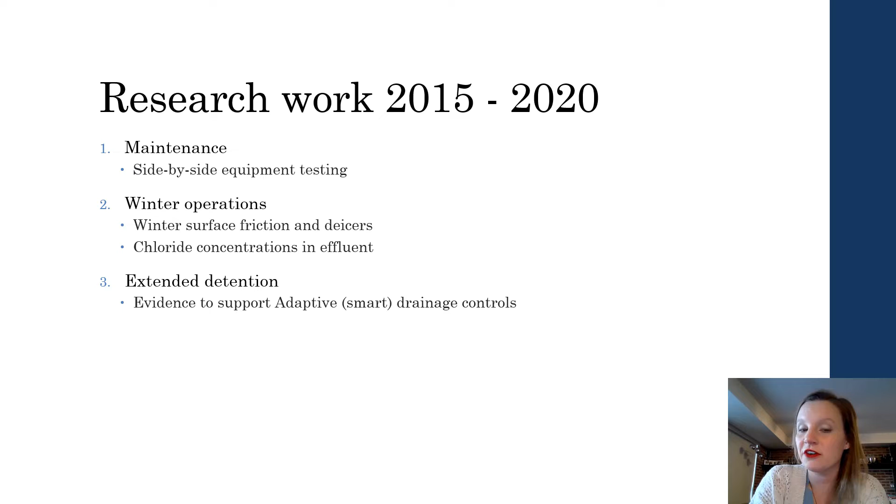Winter operations, looking at winter surface friction and best practices for de-icers, as well as observing chloride concentrations in effluent from operational permeable parking lots. And then lastly, some really new research we're just wrapping up now, looking at the use of extended detention and generating evidence to support adaptive or smart drainage controls for permeable pavements.

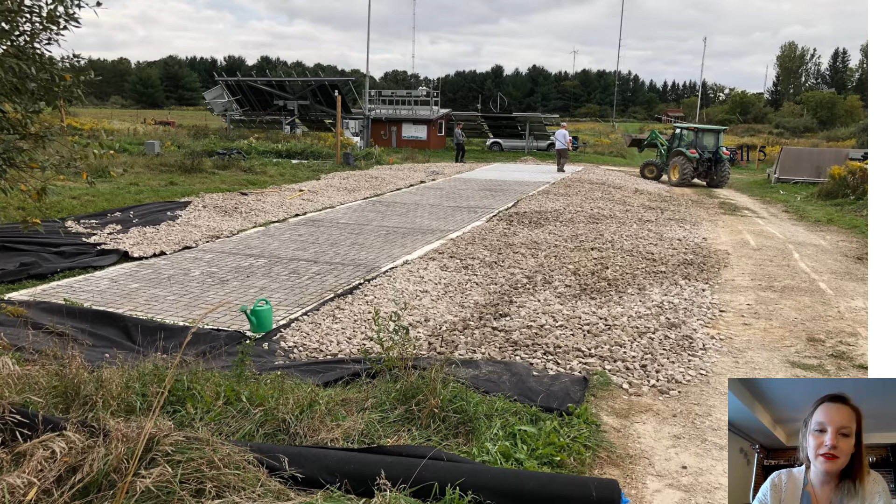So to begin with, let's talk about maintenance. Permeable pavements are passive filters. They're designed to collect all of that sediment and manage it on site instead of moving it along with the stormwater downstream. And so over time, they become clogged. The material will accumulate. That's what we intend it to do. And as that material accumulates in the joints, it leads to a reduction in surface infiltration capacity. And so over several seasons, particularly if there's no attention or no operations, some kind of maintenance or restoration will be required.

So in this research project, what we did is we constructed with ICPI a test pad of permeable interlocking concrete pavers and artificially clogged them. And then under this scenario, we were able to test in a side-by-side, reproducible manner several different maintenance technologies that may be available to property owners or municipalities. So you can see here in the picture, this is just a picture of our experimental site, and you can actually see the pavement as it's been clogged.

So to clog this pavement, we built our own sediment from waste from local yards, municipal yards, and we graded these materials so that they matched the same size distribution that you find when you go to an operational parking lot. So we applied then this in an accelerated form directly to the joints, measuring the exact amount of mass that we wanted to apply and applying it directly onto the joints. This is kind of new because with permeable pavement, water most of the time is rained directly, so you're not actually getting run-on of stormwater.

So once we clogged the surface, then we used ASTM C1781 to assess or quantify the surface infiltration. So it's a single-ring infiltration test. We pour a known quantity of water into a ring and measure how long it takes to drain. Guidelines generally recommend that a PICP requires maintenance when the results from this test fall below 250 millimeters per hour.

And what we can see in the graph in the bottom corner here is that, following this clogging process, infiltration rates on each individual pavement cell were comparable. So it was reproducible, and we knew with confidence that we had clogged the pavement uniformly. So they were all starting with the same baseline clogged condition, so that it would be a fair comparison when we evaluated the different maintenance technologies.

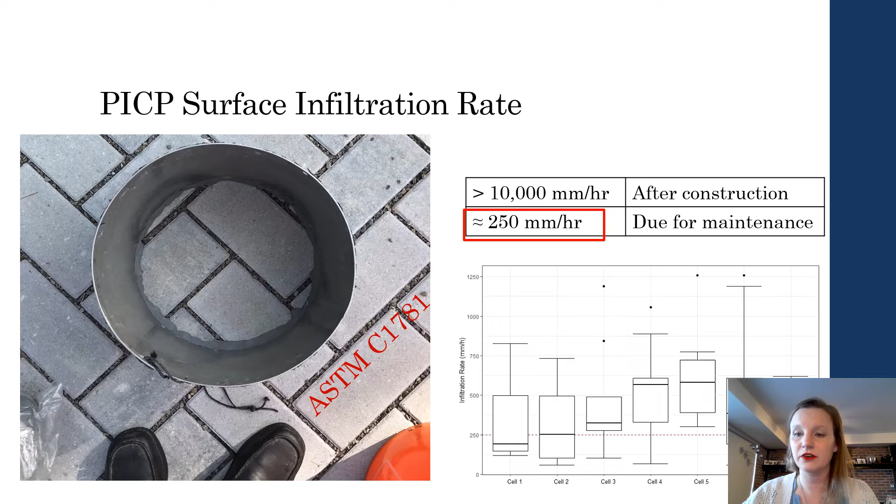So we tested 5 maintenance technologies, and these were selected consulting with industry to pick technologies that not only were likely to be effective, but also technologies that are generally available to property owners. So the first technology that we tested was supplied by the City of Toronto, and it was a regenerative air sweeper. For the City of Toronto and many municipalities, this is their common fleet now. Cities have switched to regen air sweepers because they produce less dust, which is important for urban air quality downtown.

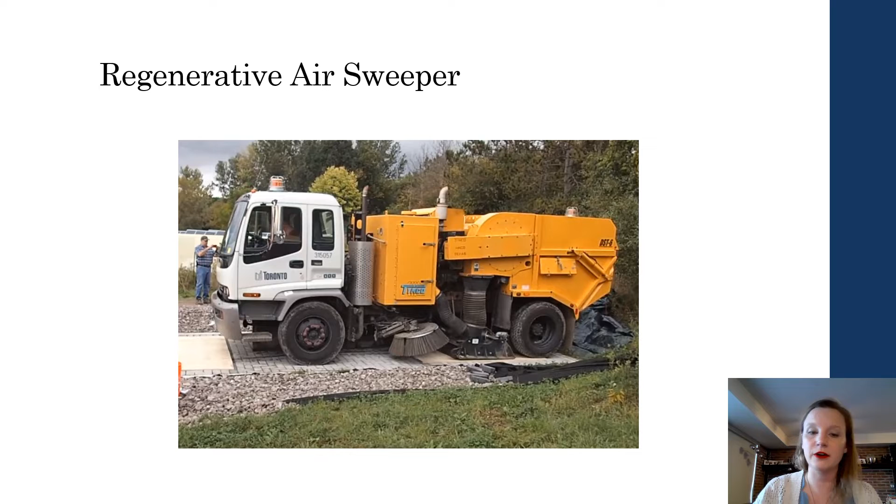Then we also tested a specialized equipment called the PaveVac, and this is a two-phased system where first the pavement surface is treated with pressurized air. That's the circular head that you can see in the one photo, and then following, the disjointed or dislodged material is then vacuumed with a high-strength vacuum.

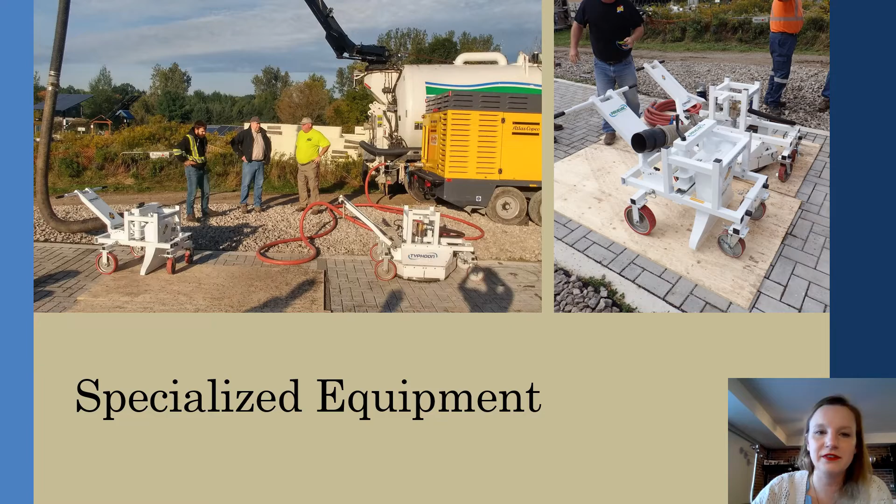So this is a product that is currently available in the US. I know that they have intentions for coming up here as well, and this was their first Canadian demonstration of this technology. Potentially fit into some of these smaller locations or odd corners that you might have on a pavement surface.

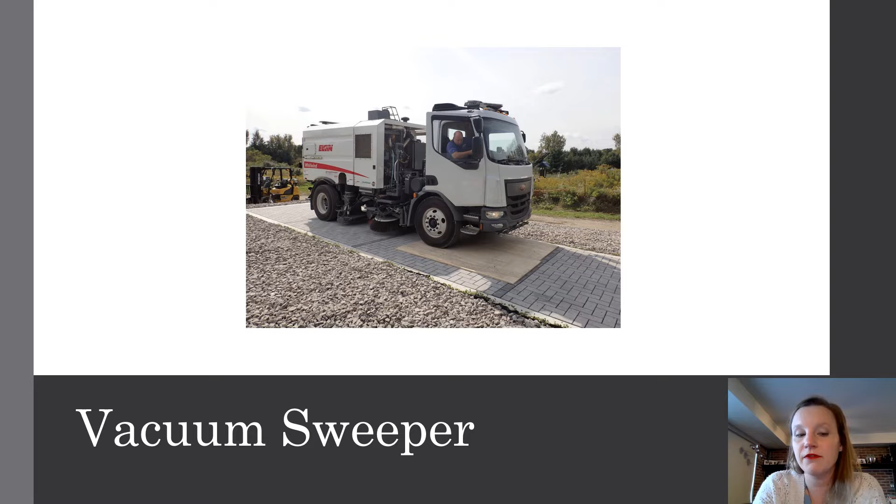Another common maintenance approach, particularly for small installations, say like an individual residential driveway or a walkway, is pressure washing followed by manual vacuuming with a shop vac. So that was, again, a third treatment or technology that we tested. And then we tested a true vacuum. This is an Elgin Whirlwind, so this is a vacuum street sweeper.

The last street sweeper that we evaluated was a waterless mechanical sweeper. This is the Elgin Eagle. So this is fully mechanical, doesn't involve water whatsoever, and was a newer street sweeping technology that was available. So here we have a little video again.

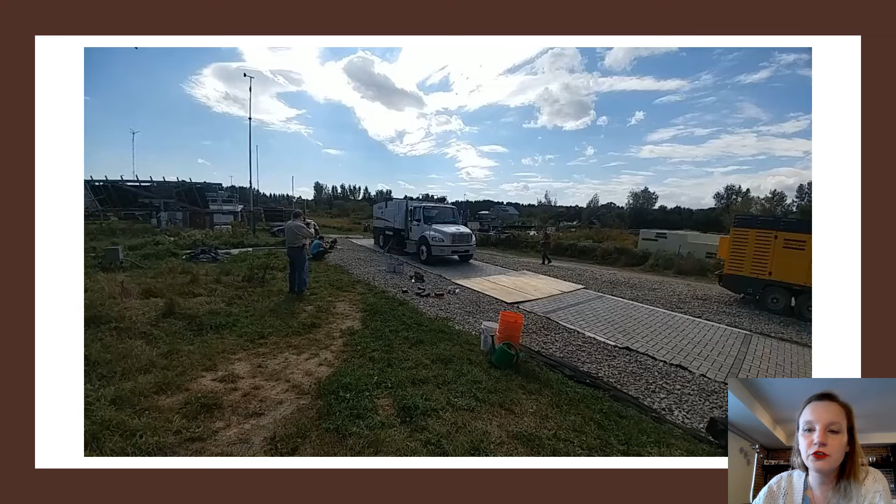So here are some of our results, and these will be in an upcoming manuscript submission. We're still sort of finalizing it, but it's also available in a report to ICPI that was finished last spring. So what we found, first of all, all of the technologies provided restoration of surface infiltration. So that's very good news. There are lots of options for maintaining your permeable pavement.

The most successful technology was, not necessarily surprisingly, the high pressured air and vacuum specialized equipment that's been designed specifically for PICP. It was the only product that was able to consistently restore the surface infiltration to pre-clogging, as-built, brand new levels. And in fact, it was a little bit higher because when we were reapplying the jointing material, we didn't have anything to compact it back in. We were just putting it in manually with a push broom. So in fact, we found the results were higher than post-construction.

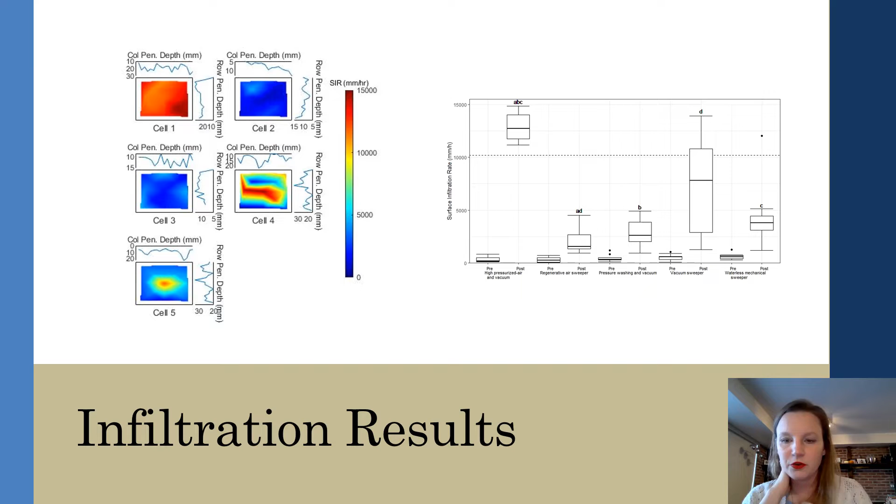So the next project, and this project was actually running simultaneously in the winter months with our maintenance research, is looking at the use of winter de-icers and how to best optimize de-icing practices for PICP. So we are interested in winter performance for a number of reasons. The presence of snow and ice creates a number of hazards that we need to mitigate in the winter.

First of all, we're concerned about our pedestrians slipping on a slippery or icy surface. And then we're also concerned about our vehicles skidding. So the action of slipping and the action of skidding are slightly different, but they are both affected by overall surface friction. And then also from an environmental perspective, we also care about road salt pollution.

Sodium and chloride in excessive amounts can cause a great amount of environmental problems, even health hazards, and expedite degradation of infrastructure. So there's a lot of reasons why we should and would like to reduce the amount of salt that we use in the winter. I'll mention again that results from this work are available through a Transportation Research Record publication, so just be in touch if you want to get a copy.

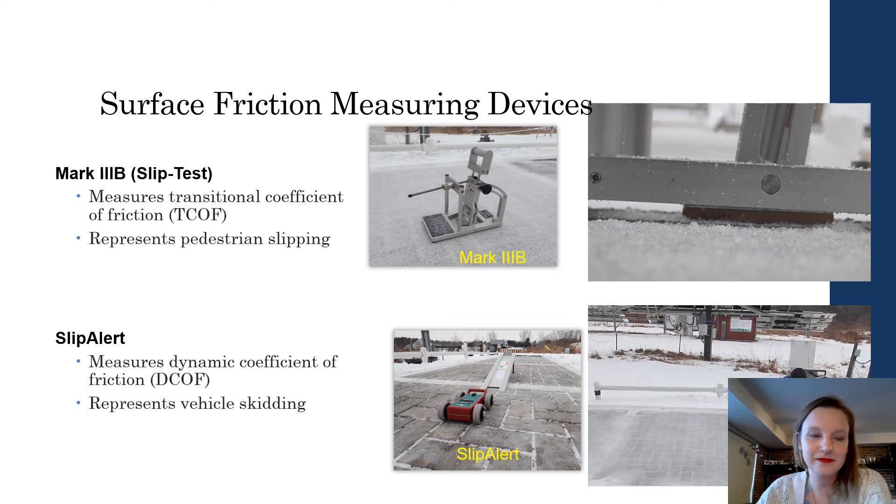The second one is to look at skidding. And so we had a SlipAlert, which is a little car, and we can assess how slippery a surface is based on how far that vehicle travels. So we had 4 test cells and then 1 asphalt control. The asphalt did have a slope and was drained to a mini catch basin because, of course, water's not going to infiltrate. It has to run off the surface.

2 PICP cells were treated with road salt, applied at a recommended medium, 10 pounds per 1,000 square foot, and then low, 5 pounds per 1,000 square foot rate. And then we had 2 additional cells that were treated with the same road salt amounts, but the road salt was now pre-wetted with beet juice. So this is a green or eco product that some municipalities have been experimenting with or considered. Pre-wetting with beet juice changes the melting point, so it can allow the salt to be more effective at different temperatures, and in theory may allow you to achieve the same de-icing effects with smaller quantities. Finally, the asphalt was treated with our regular medium road salt application as a point of comparison.

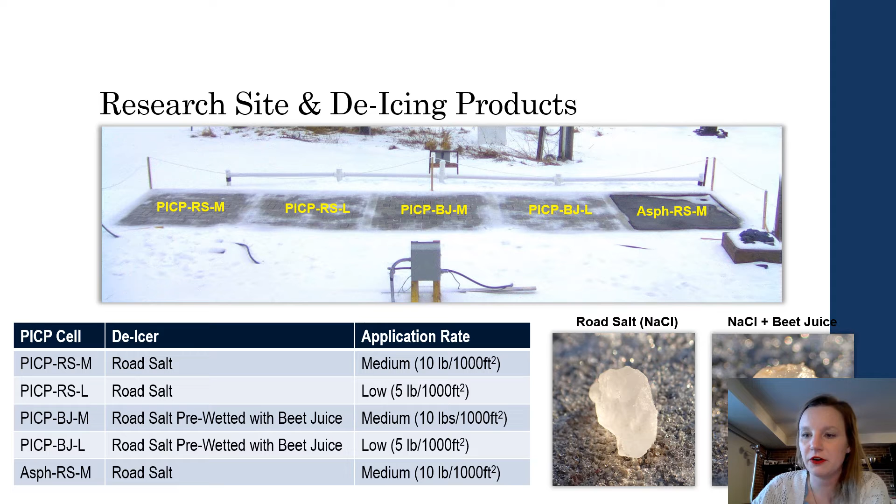So we instrumented this site with field cameras so that we could monitor for the presence of snow or ice remotely, as well as get a sense of snow occurrences happening overnight. And then we had surface temperatures to look at temperature conditions on the pavement itself.

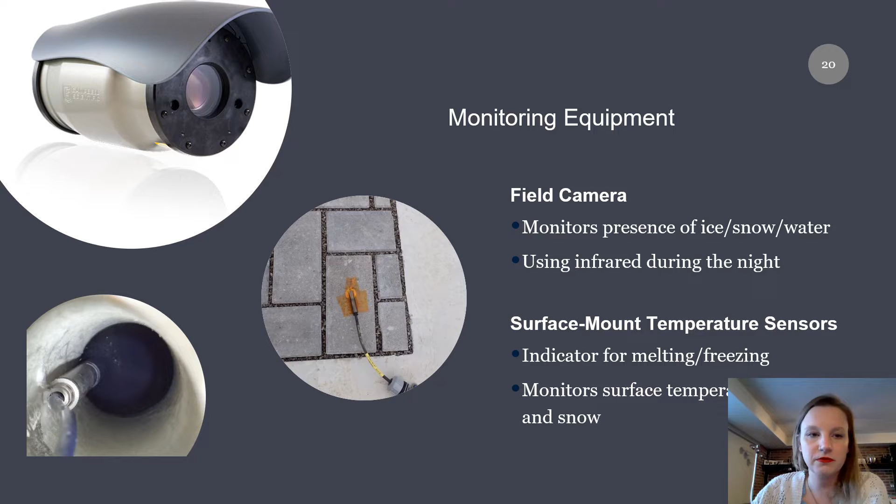So one of the interesting anecdotal events that we had is we actually had a flooding event on our asphalt control, which really speaks volumes about the effects that permeable pavement can have in the winter. So what ended up happening here is we had a rain on snow, icy rain event on February 24th in 2019. And our catch basin, not being a fully sized catch basin and very shallow, ended up becoming quite filled with ice and couldn't drain properly. And so we had pooling water and overland runoff from our asphalt. So we had to go back in and we actually put a heat tracer through this to prevent that from happening again. But it shows the challenge that we deal with in the winter.

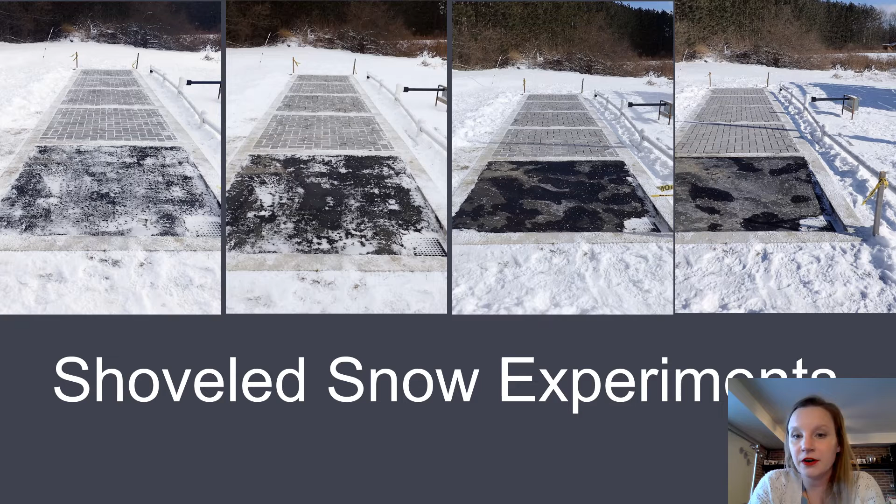So we looked at a couple of scenarios. The first year, we focused primarily on shovelled snow experiments, replicating as much as possible standard operations where you would have a snow event, a crew would come in, they'd plow or they'd shovel, and then they'd throw down some salt afterwards. And we looked at the surface friction following.

So as you can see, one of the things that is different between the asphalt and the interlocking pavers is the surface texture. And we very quickly realized that there's a number of factors that influence the friction and the pavement's response to de-icing. The poured nature of the asphalt actually created a more heterogeneous surface that has inherently more bumps and rivets, whereas the precast pavers are inherently smoother.

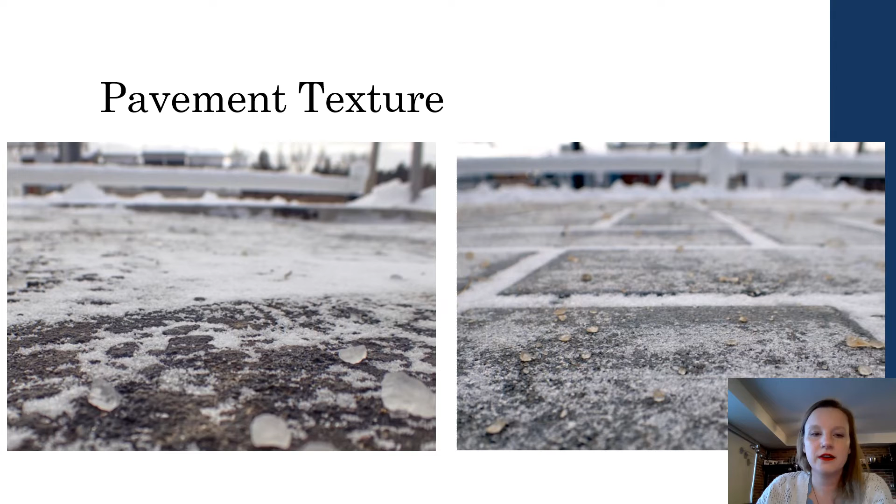That being said, under dry conditions, they had comparable friction. So after we applied salting, we collected friction measurements immediately, normally 10 to 20 minutes, and then a second one 10 to 20 minutes afterwards, and then a third test 1 to 2 hours after. All of this would vary depending on the day.

But very quickly, within 10 minutes sometimes of applying de-icers, you would see that the pavements had responded and were now trending to be not slippery. And in fact, they were responding faster than we were seeing the asphalt respond. And this pattern would continue as we moved a few hours later.

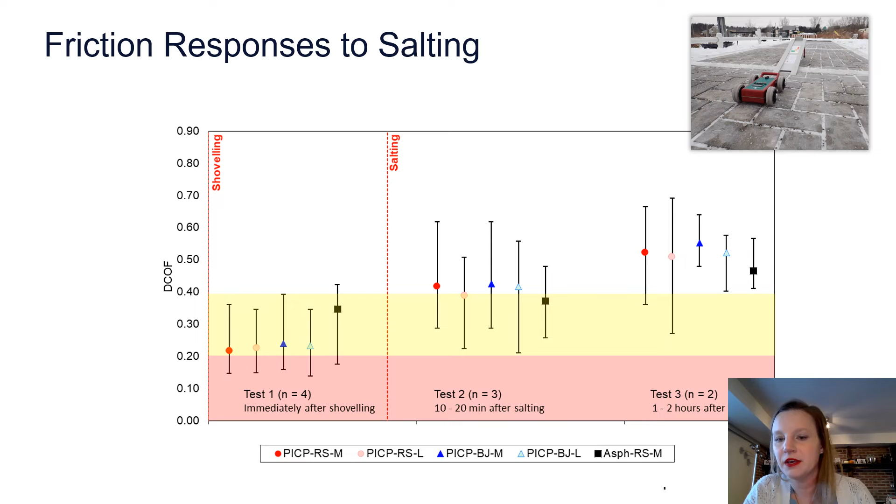We saw very similar trends with the Mark 3B, the one that's replicating someone tripping. Again, there being less friction before salting due to the differences in pavement, not permeable versus impermeable, and then comparable responses following de-icing.

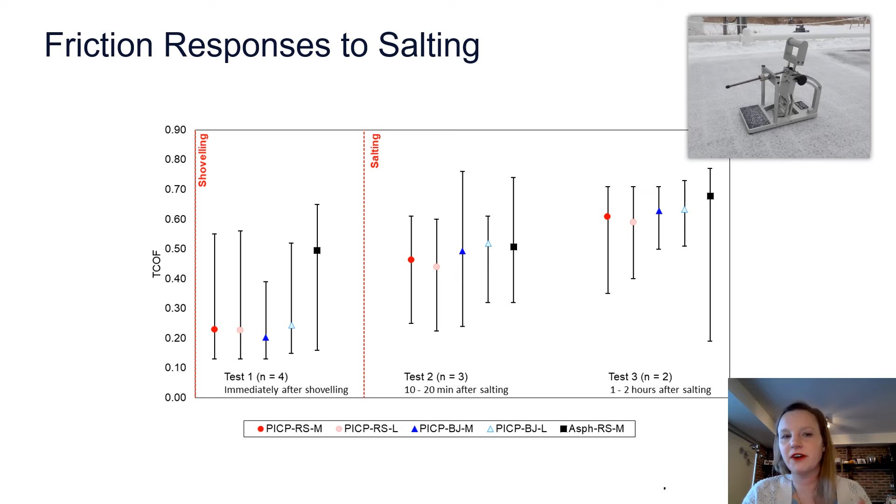We also noticed that the salt remained on the surface very differently. On the permeable pavement, we would regularly see complete, undissolved granules sitting on the surface. And what we realized would happen is as soon as a small amount melts and infiltrates, the salt itself didn't get coated with water, and hence it could not dissolve. So it was left on the surface a lot longer.

In contrast, what we would see on the asphalt is the entire thing would dissolve, and in fact, it would then leave a residue, almost like a brine residue across the entire surface. And I'm sure that picture looks very familiar to many of us. We've seen that in the winter.

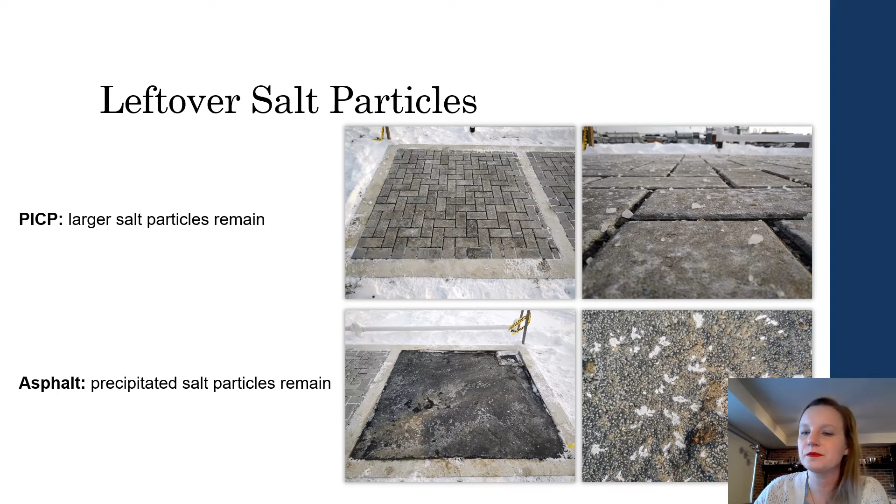So what was really exciting about this is where we could really see the opportunity to mitigate risks in the winter environment. So we had an ice cover experiment in our second winter, where, as I said, we covered the surface manually by walking back and forth with a very thick layer of ice. And then we applied our de-icers.

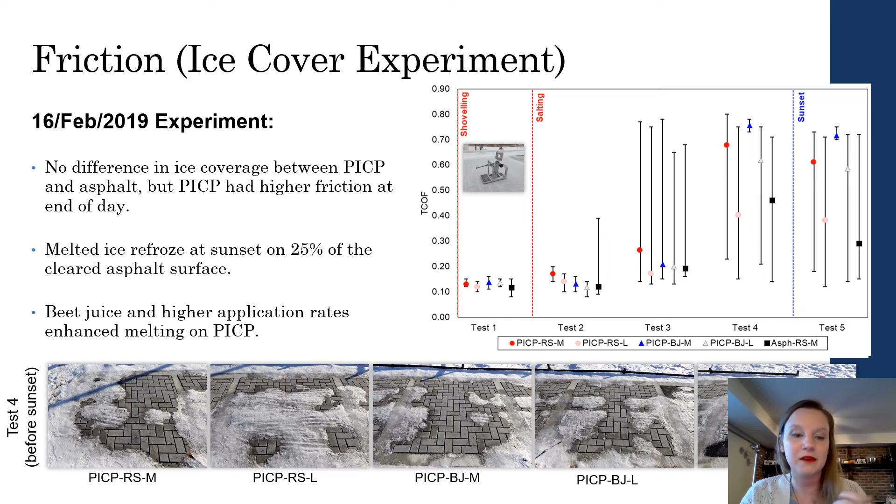You can also see in the photos below that the photo in the middle, which is the beet juice at the medium application rate, has the most bare pavement at the end of the day compared to the other plots. So this is all exciting. The location here that I was showing you, however, wasn't the best to actually look at chloride because it's not an operational parking lot. We were just putting down chloride or road salt when we were running our experiments.

And so simultaneously, we have also been monitoring chloride concentrations from an operational parking lot in St. Catharines. So this permeable parking lot installation is with the City of St. Catharines at their Lake Street Service Center. It was built intended to facilitate research. So it has several different permeable pavement systems with separate monitoring chambers.

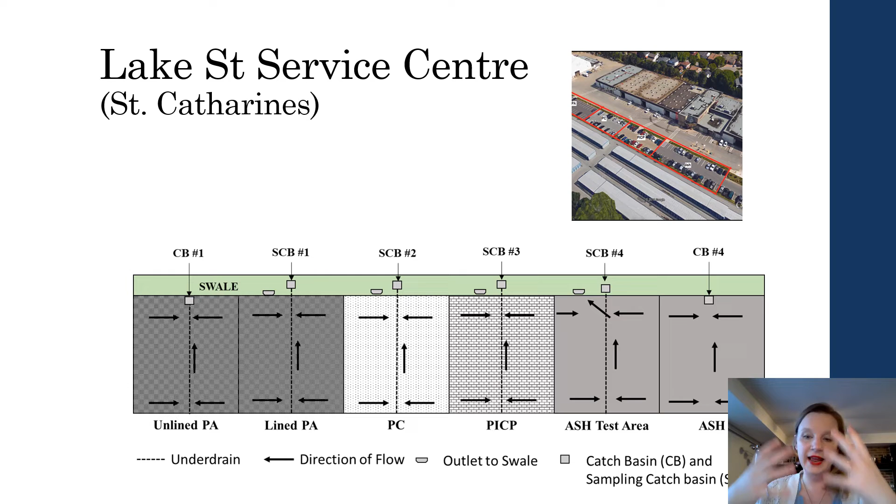And it was built as a zero exfiltration system, which is somewhat unusual, but also allows us the direct opportunity to actually sample water that has infiltrated through the permeable pavement and the reservoir. So we instrumented each of these monitoring chambers with a weir box and a water level to measure flows, and an electric conductivity measure, which can serve as an indicator for chloride.

Then throughout the winter, we went and collected water samples, and then we would measure chloride and conductivity simultaneously so that we could create a relationship curve. And this allowed us to collect continuous chloride concentration data from an operational parking lot. This parking lot was salted by staff. Unfortunately, we were not able to get the quantity of material they put down, which is a disappointing aspect.

But because these are zero exfiltration, we would anticipate that all of the road salt applied would make its way out. The only real question is how long is it going to take? Chloride is very non-reactive. It tends to be conservative. So most LIDs will not remove chloride, hence why we're so interested in reducing their use in the first place.

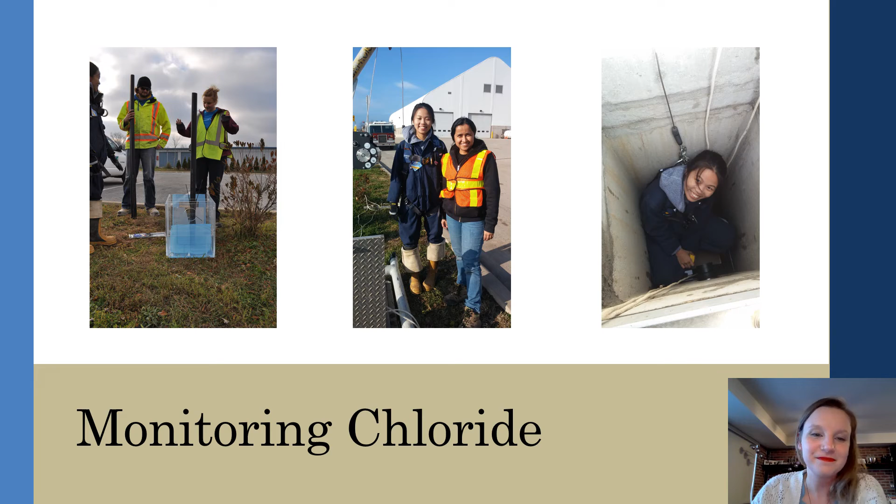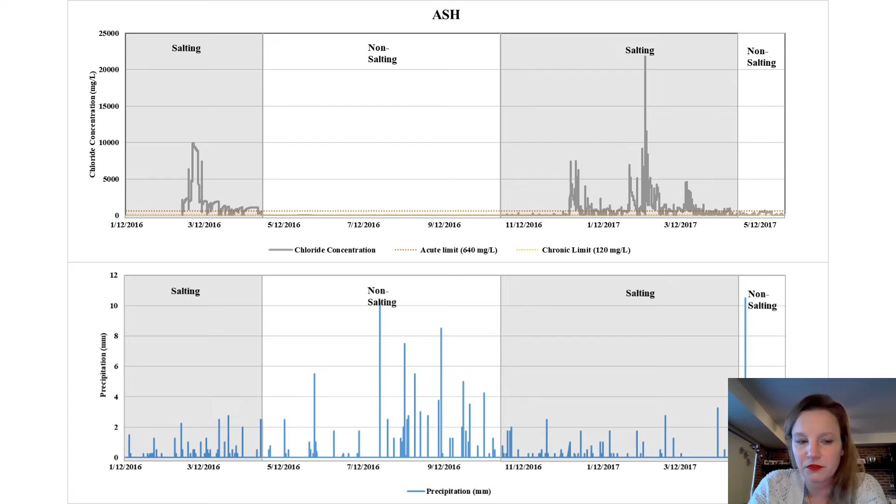Below this is just our precipitation data. So you can see, in the winter, your chloride concentrations often do coincide with rain events, but not necessarily. It has more to do as well with the temperature and whether you're having thaw or melting snow, as well as rainfall.

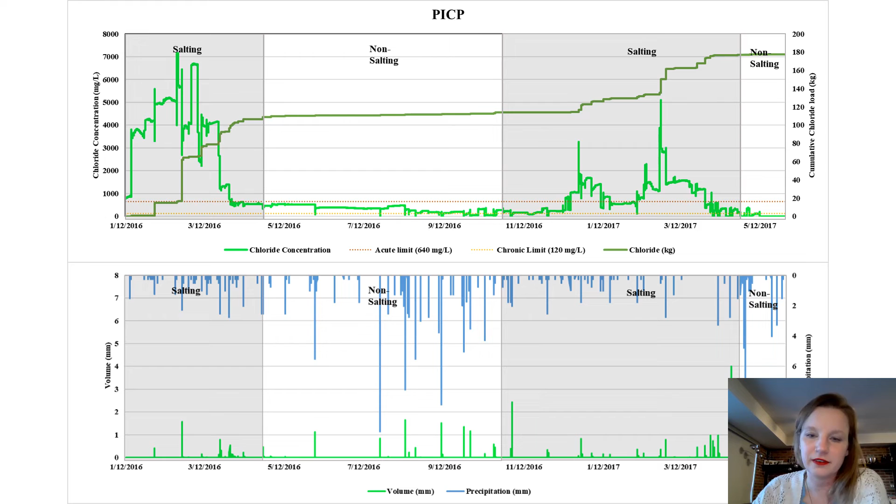We also used our flow data and concentration data to calculate event mean concentrations. And one of the things that we were curious about is, as researchers, including myself, have hypothesized, that the salt we apply in the winter we would see leaving the system in the summer. And from the data that we have here, this suggests that we aren't seeing that kind of retention. You notice, as soon as we start getting to April, there's a big drop in concentrations and then stabilizing down, and then a little bit more of a drop towards the end of the fall.

But really, it looks like, with the spring thaw, the majority of salt that we observe in the effluent is flushed from the system. The higher levels of salt that we do see, I suspect, are more related to the products themselves. The fact that all the aggregates are going to have some salts associated with them, cement, concrete, any of these construction materials, and that there is some weathering or even just fines, very small fines, construction dust, and so on. That is a part of the water that we observe in the summer.

So, the last project that I'm so excited to talk to you about today is work we've been doing on extended detention. So this is a really interesting study, and this is preliminary data. My graduate student is finishing this. I'm hoping we'll have a publication on it later in 2021. We hear a lot of interest about smart infrastructure and adaptive management.

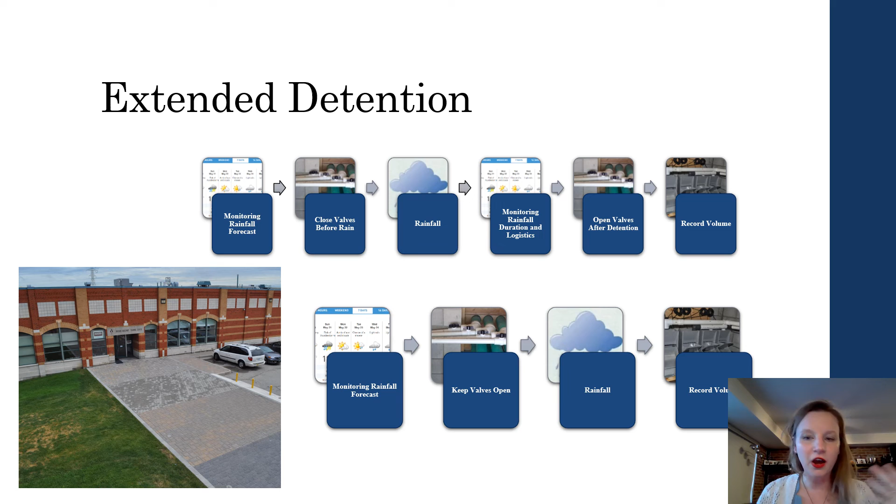And this is something that we sometimes recommend. You can actually service impermeable surfaces, have the water diverted or directed to permeable pavement and infiltrated there. So we were able to look at both the condition where you just have your cell and you're only receiving the rainfall that hits it, and some of these other conditions that occur in some of our site design where maybe you do have a building or maybe you do have some additional walkways or parking lots that are impermeable that are draining to your permeable pavement.

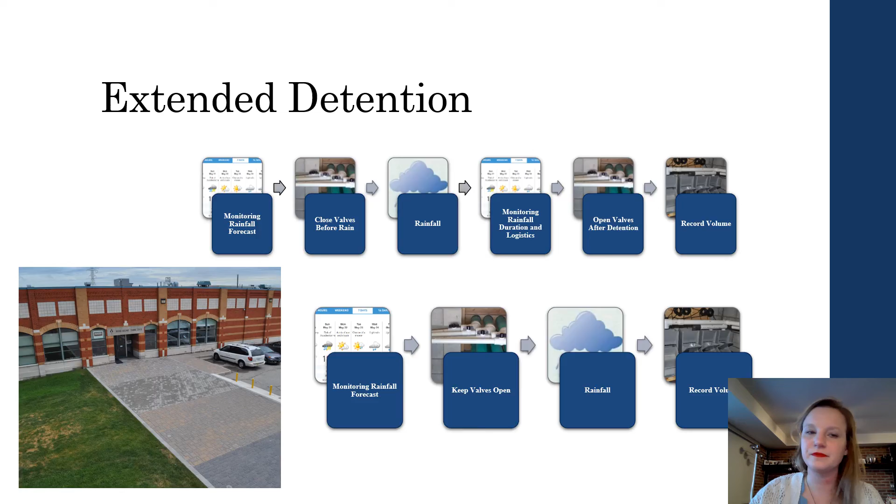So I only have the one result slide on this because we're just sort of wrapping this up, but needless to say, the results are very exciting. Our 2 middle cells, the PICP2 and PICP3, the ones that were just receiving rainwater, we didn't see any benefit to having extended detention. Something that we were surprised to discover was that this site was actually very well draining.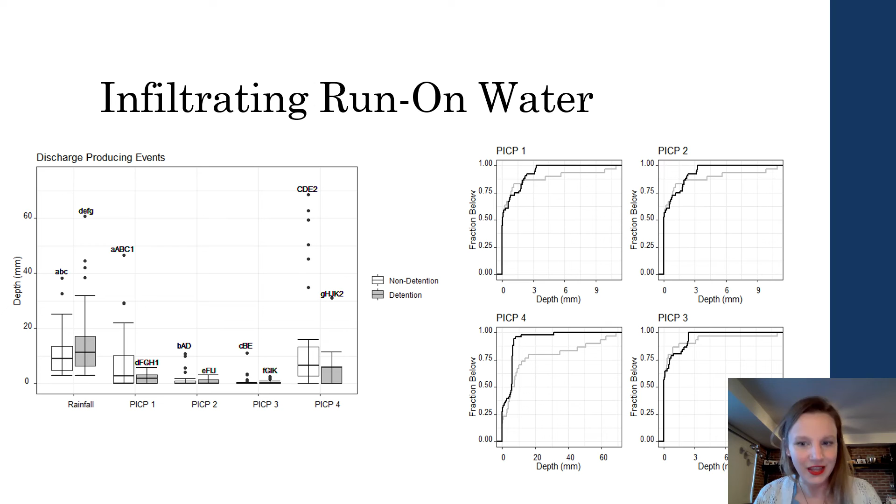There is sand like another meter down, and so there must be some fissures or some sort of heterogeneous thing, some preferential flow paths that's allowing water to drain, because we had very good volume removals, much higher than we were expecting. So it wasn't that surprising that we didn't see any impact by closing the valves or opening the valves, because water was free draining or infiltrating very, very fast, or faster than we expected to begin with.

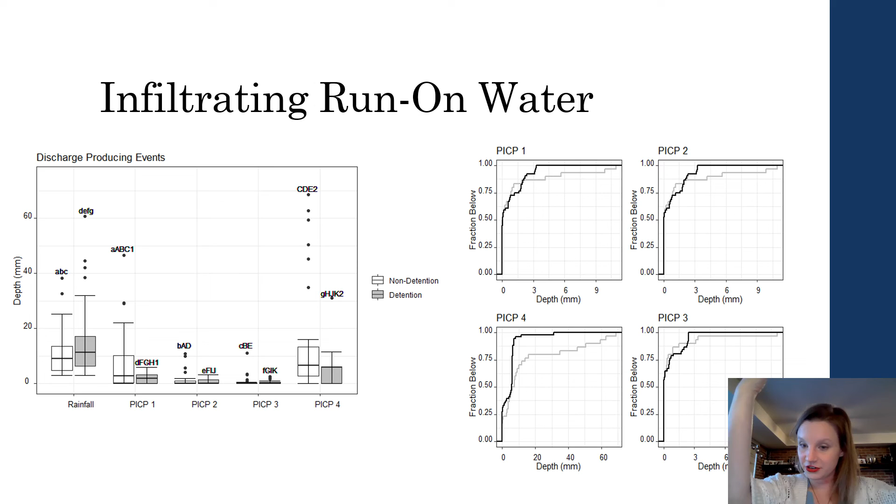However, for our pavements that had additional water inputs, so PICP1, which is the one that was receiving the water from the adjacent building, and PICP4, which was receiving runoff from impermeable surfaces. If you just look at the box plots here, the white box, that's the one that has no detention, so you get much larger discharge volumes. And then the gray is when we force detention, and we can see we really removed some of these high events and were able to actually infiltrate a lot more water.

So this is very exciting to show. No one has tried this yet, and so we're going to actually say that this is a useful approach. And what it means in terms of policy or management is that we're increasing the likelihood that we can manage a rain event. The number of times we're going to produce stormwater that needs to be delivered downstream is reduced. It's less frequent. And so there's big benefits in terms of mitigating the risk of flooding to the greater community. So super, super exciting, fresh off the presses, if you will.

So what have we learned? I hope that this hasn't been too divergent, but I can never resist the opportunity to share some of the new findings that are coming, because of course I love LID and permeable pavement. But what we are seeing is really that permeable pavements are not the same as an impermeable, conventional surface. They're stormwater infrastructure and transportation infrastructure simultaneously. They require their own operational practices, and they achieve their purpose best when operated and maintained as a stormwater transportation hybrid system.